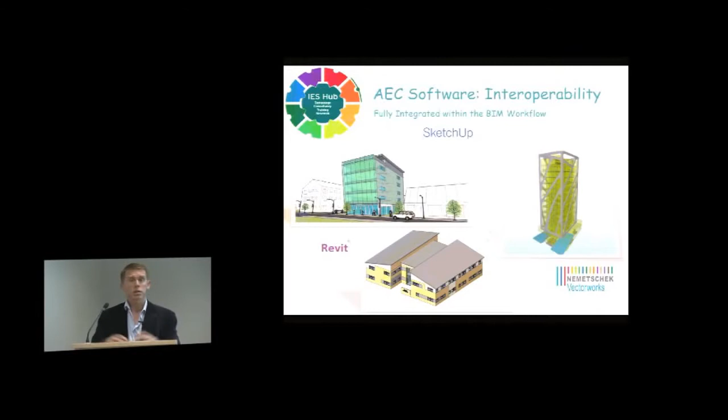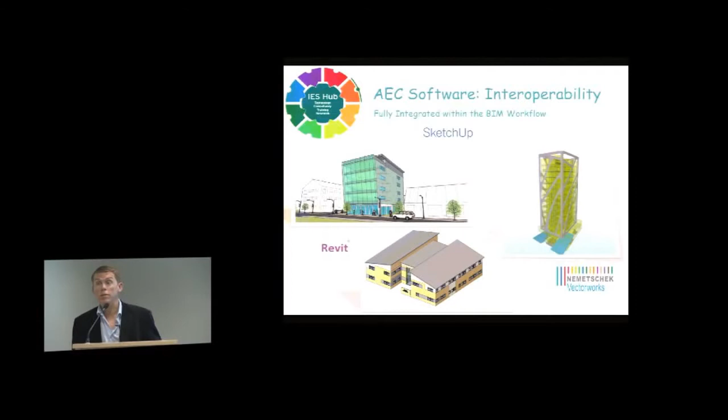Okay, interoperability, really important, with the UK GBC talking a lot about how important interoperability is for the design process, particularly when we're talking about BIM. We are part of the BIM workflow. We've always referred to ourselves as BPM, Building Performance Modelling, as opposed to BIM, Building Information Modelling. But in essence, it's extraordinarily similar - it's information and it's being used for a process. The BIM world is mainly to do with drawing production, but of course there's structural and other things that go with it. For us, BPM world is the performance side of things, and for the users of our software, you'll be very familiar with what those things are. I'm not going to talk to those today, but the interoperability between BIM and BPM is something we take a great deal of care over, and something extremely important, both for ourselves as an organisation, but also for all of you guys, the users.

You will be using some BIM platform of some description. It may be Revit, it may be SketchUp, it may be other platforms. Vectorworks, for instance, is one that we're going to show today a little bit. And the interoperability between that tool and your interoperability between an architect, if you're the engineer, or you as an architect, if you're using our software with our tools, is very important.

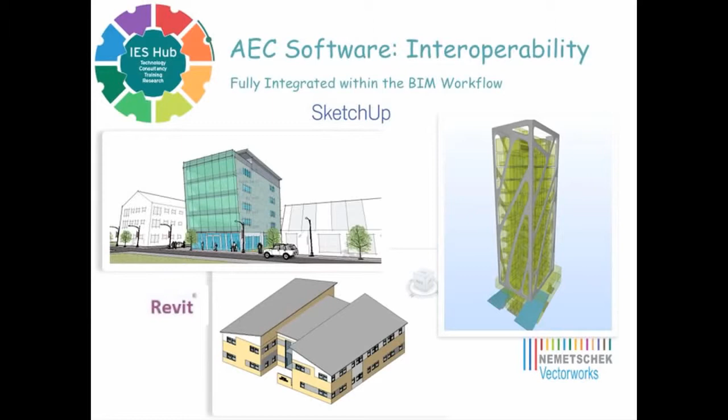We've been around 18 years. People have been sharing information and data with us for a long time. When we first kicked off, we had to create our own drawing platform because there wasn't a drawing platform to do things in 3D when we started off. We still have the drawing platform, but more and more we're doing interoperability with other building information models. So you'll be familiar with our Revit plugin - we've had that since, I think, 2008. You'll be familiar with our SketchUp plugin - we've had that since SketchUp version 6, similar timescales. We have improved that recently, and I want to show you that a little bit.

Really recently, for the main release back in April, we've started down the interoperability route using IFC. Particularly recently, we've been doing some work with Nemetschek and their Vectorworks tool. Nemetschek are releasing today Vectorworks 2013, and as part of that release, we have capability to take IFC from their models into the VE, and I'll show you a few examples of that and how that fits together and how it's going to work.

We're part of the Open BIM Forum, or at least we're just about to be, and with the new release of Nemetschek's Vectorworks 2013, we've actually got two routes to share information. Vectorworks 2013 has a GBXML export, which most of you should be familiar with, and we also have an IFC connection with Vectorworks as well. To give you an example of the kind of information that's already being shared - we've worked quite hard with Nemetschek over the last 6 months or so in order to ensure this connection is robust.

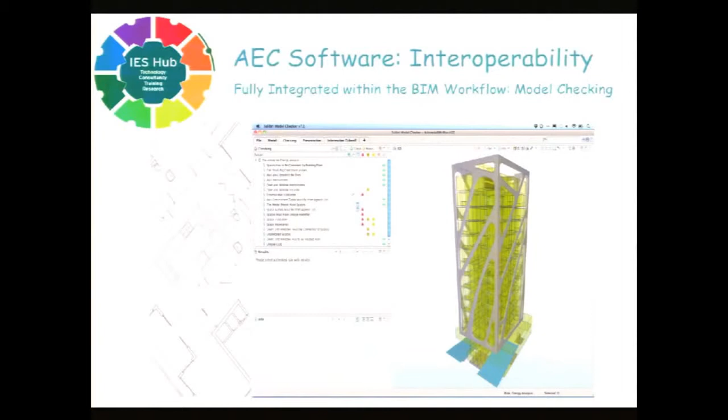I'm going to show you one particular example. It's a pretty complicated building. That's not our software - that's a piece of software called Solibri, which I believe is free. It's an IFC checker tool, and this is the IFC from Vectorworks being shown in Solibri before it gets passed to IES. It doesn't have to go via Solibri, let me be clear about that - it's just a way of checking IFC.

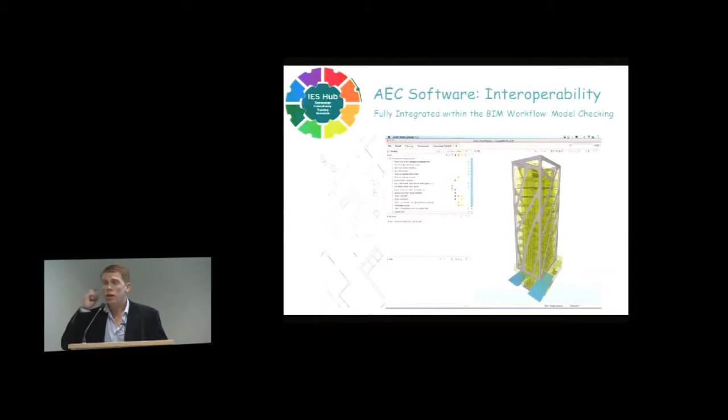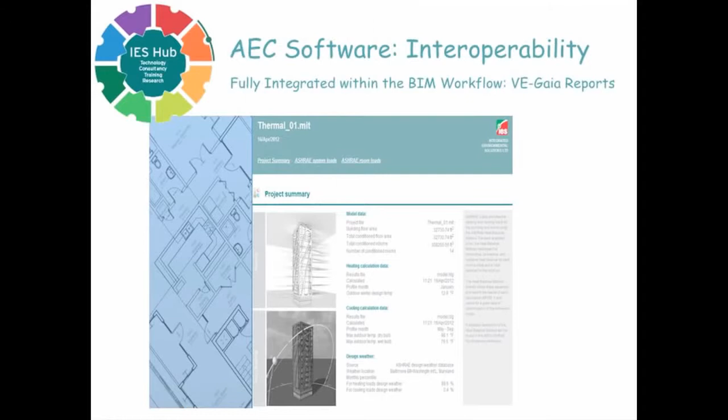This model is quite a complicated multi-storey building with an interesting shaded facade. This IFC is passed through to the VE, and I'll show you a few examples of the output we've got from it. That's not terribly clear there, but the VE Gaia reports that you'll all be familiar with can work on this particular file interchange, and also all the regular SunCast and MacroFlo type work that you can do within the software has been done with this pretty complicated model.

Now, the important thing to note about IFC is it's got ways of defining geometry which are able to cope with what we would call within IES the inner volume method, where you've got thicknesses of walls being taken into account and depths of reveals. And in IFC that's called second level space boundary.

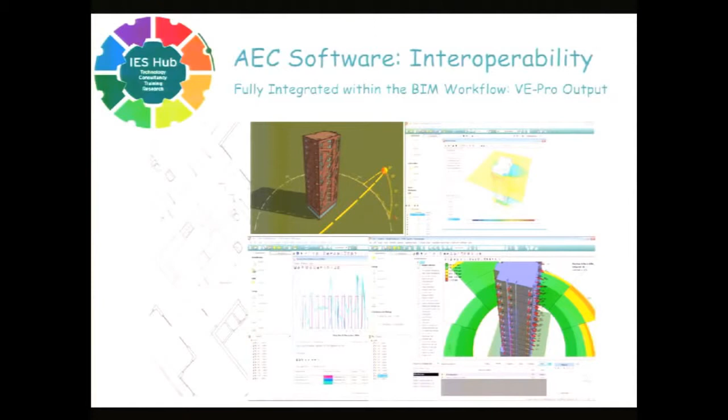That's a pretty sophisticated way of manipulating the entirety of the geometry through into an IFC file format for then to be used in any sustainable assessment. If you think about daylight modelling using the radiance part of the software, and also energy modelling, the depths of the reveals and thicknesses of all the constructions cannot come through GBXML. That level of geometric robustness is really important if you're doing those kind of studies.

We're focusing particularly today, because Nemetschek are launching Vectorworks 2013 today, on their IFC interchange with us. But any of the BIM platforms that export IFC, we could now take that information into the software. It's an alternate route. There's GBXML for you, and there's IFC from all packages. There's the Revit plugin, and of course then there's the SketchUp plugin as well.

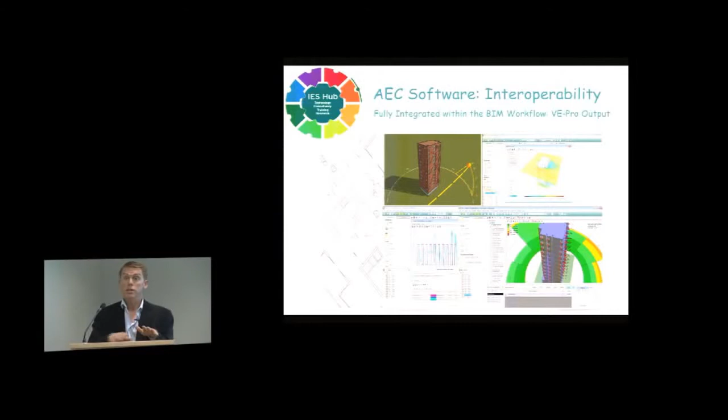That brings me nicely on to the features I want to talk about in the SketchUp plugin.

Oh, I forgot one thing, sorry. The sample model that you saw can all be got from the Nemetschek website. Since their launch is today, they didn't actually have the exact address for me, so if you email sales@isv.com, I can forward that link on to you and you can get that project and see how the thing fits together. It's an extremely big step for us.

With the UKGBC looking to make sure that projects can be interoperable with places like Scandinavia, all requiring it, with the Nordic regions all requiring it, with the GSA in America, the General Services Administration, requiring that you've got interoperability, our capability with IFC is a really important step, certainly on the building performance modelling side of things, in order to ensure that robustness of the design process between drawing production and analysis.

The SketchUp plugin has been around a long time, actually. Version 6 of SketchUp, and we're on version 8 now. I don't know if you're on the beta trial for version 8, but our plugin already works in version 8, and there's a few new features that are going to appear because of that. There's also a few features that crept in at the end of the last release that you may or may not have seen that I want to draw into it all.

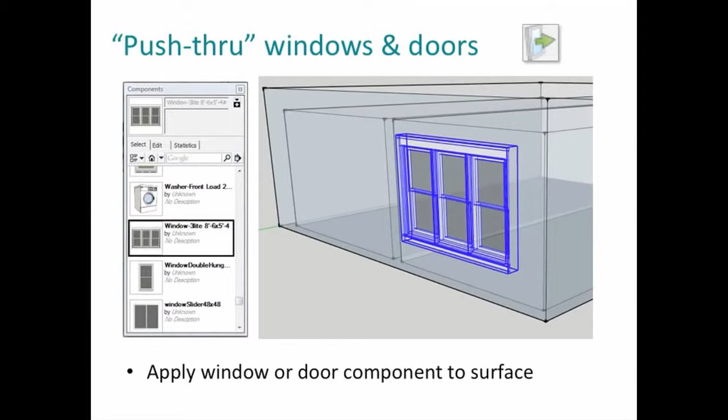You don't have to create your own window arrays. You could go to a particular manufacturer, get their components, and download them into SketchUp, and you've got the thing, which is fantastic, because then you've got all of the correct geometrical information you need in order to model this for daylighting or energy or whatever you might be doing with it later on.

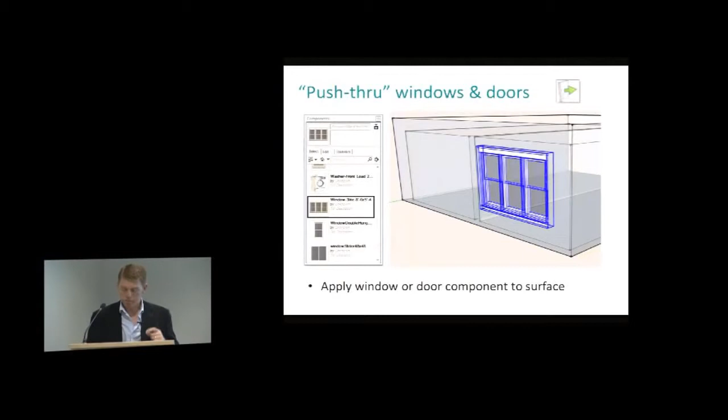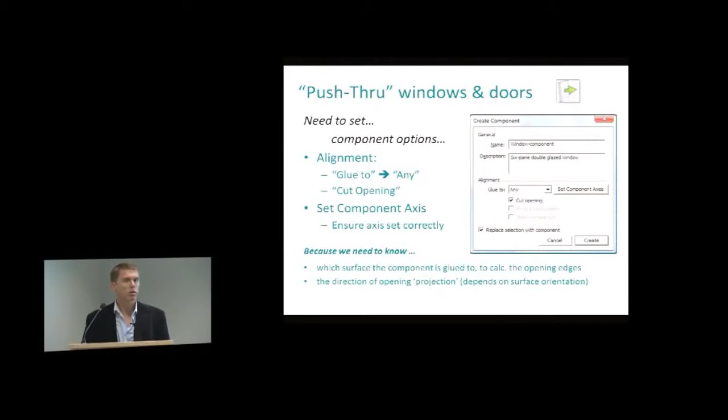Not many folks are using this feature. There's a few things to note about it that are quite important. One is you have to turn on the glue feature, so it glues the component to the surface that it's on. We'll be passing this presentation around afterwards, so you can pick up on these things.

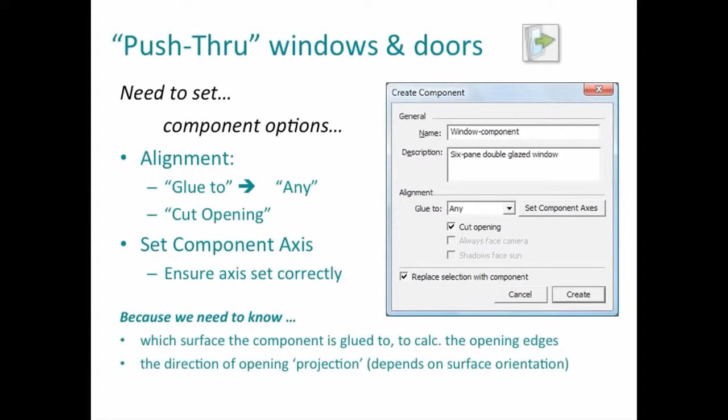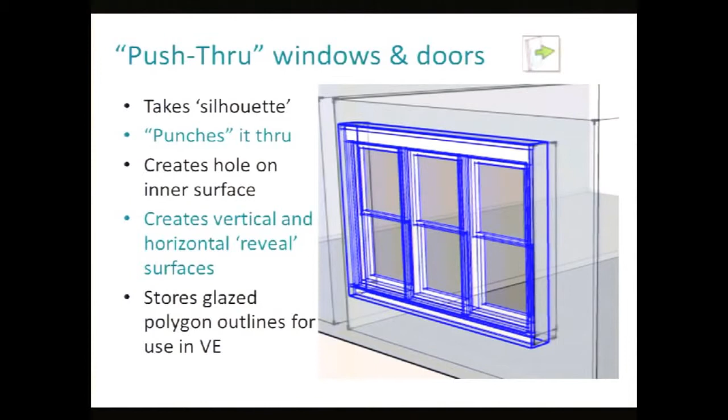When you do, we've got an accelerator in the software which, after you place the component that is a window or a door or any cookie cutter, if you like, that goes on any surface, automatically creates all of the reveals for you. So you place all of these windows all the way around all the stories, select them all, and say, cut them into the geometry. So you've in effect cookie cuttered in everything. It does that automatically for you. And the important bit in terms of modelling is it stores the glazed areas correctly in the VE model, ready for any further analyses.

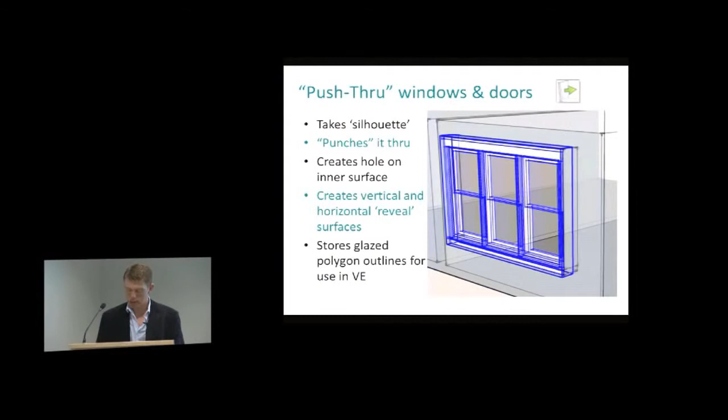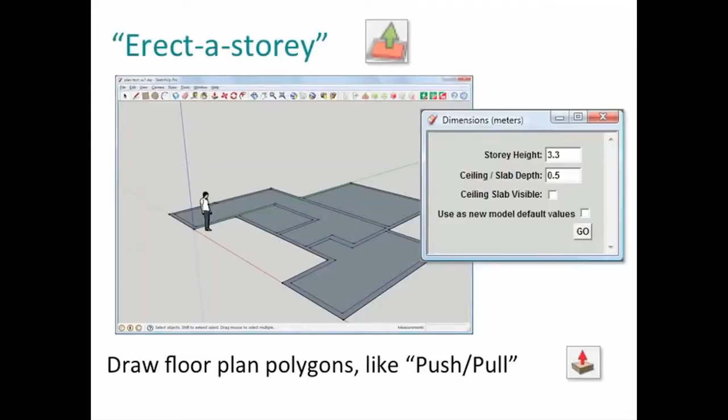Something else folks aren't picking up on, this was in the latter version of version 2: you only have to draw, if you're starting from scratch, the layout of the thicknesses of the walls and the floor plate, because there's an accelerator that will draw your walls, cap all your ceilings, and put your ceiling slab on for you. What we see quite often is people drag the walls up, get all the walls, put a slab on top, then extrude that up again to create a slab. That's 4 or 5 extra pieces of work you need to do, and this will do it automatically for you. It's a real time saver.

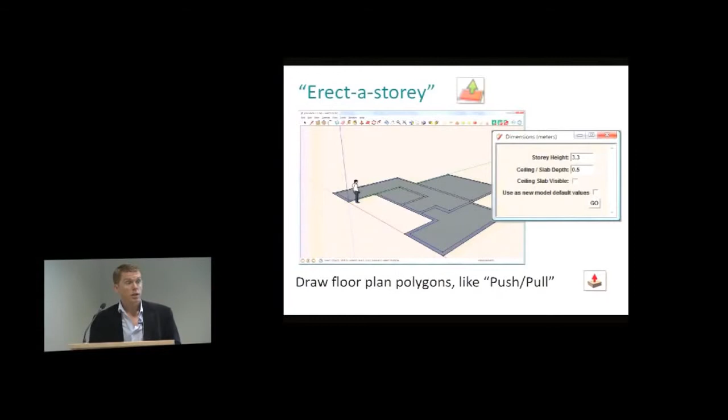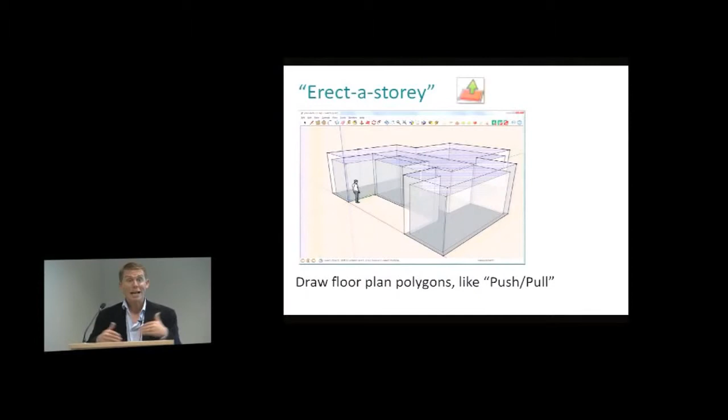If you've got a multi-story building as well, you'll notice there's a multiple story choice, which means you could do 25 floors in one operation. It's a real big time saver. And you can see, just from that floor plate, it created the enclosed volumes in exactly the way that's needed for energy modelling and daylight modelling. So it cuts out the opportunity for the odd mistake to creep in when you're doing your drawing in SketchUp.

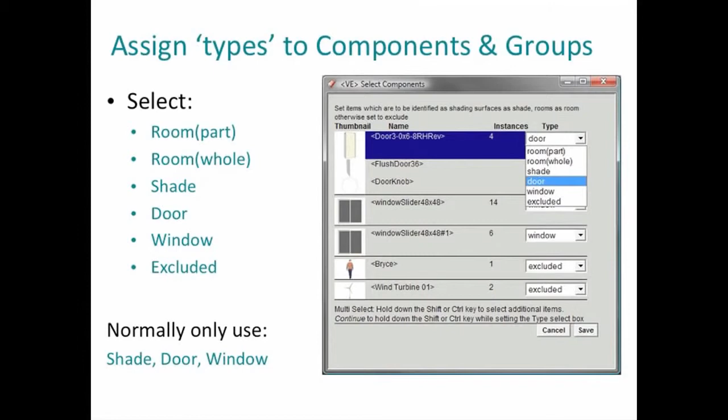Components and groups, another new feature. We use those to define what a window array is or what a door array is. We use groups to group up buildings for simplicity of selection and deselection when you're just generally using the SketchUp program, not for reasons of analysis particularly. But there's one in there that people don't use, and it's another one of these real big time savers, and that's the whole room choice, room whole.

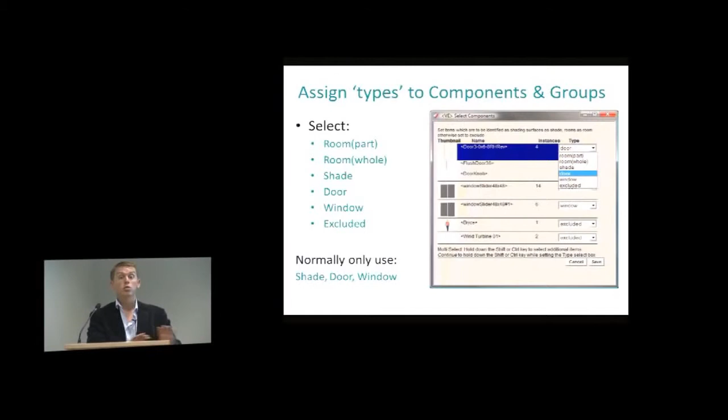Now, what is that? A lot of people still ask me what that is. What it does is once you have defined rooms as rooms and you've asked the SketchUp plugin to analyse all the rooms, it holds that room list in memory and never looks at those again. It never reanalyzes them. The analysis of the model, if you've got a very big model, can take a while. So after you've analysed the rooms once, you store them as rooms, and you never have to analyse them again.

If you are doing multiple variations and multiple additions and subtractions on your building, which architecturally you will be, this is a real important feature, and I know from the support questions that people aren't really using this at the moment. So please use that. That's just an example building of that.

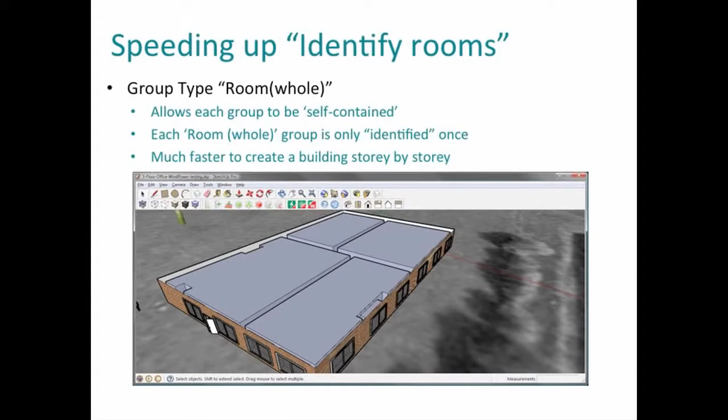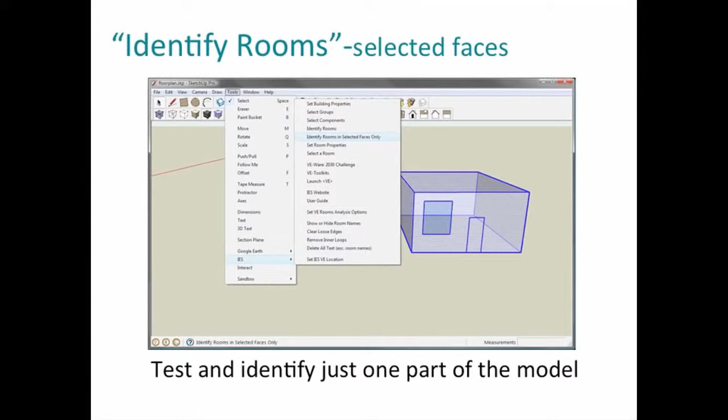The next is identifying issues. As I said earlier on, if you follow the workflow, things work nicely, but people are in a rush and lose concentration, and sometimes errors creep in. Nobody's perfect. There's a few tools in there that help you get to the bottom of where there are issues. What's the biggest issue when you're exchanging geometry or preparing geometry in SketchUp for the VE? That you've not got an enclosed volume.

That's the one that crops up the most. What's an enclosed volume? Simple. In this room, if we think about it very simply, there's a floor, a ceiling, and walls. As long as you've got all of those, we know what the volume is, what all the surface areas are, and all the heat transfer connections to everything around us. If some of those are missing, and they're not defined as windows, holes, or doors, we need that resolved. We need you to tell the software what that is. So we kind of moan at you a little bit and say, that's not a fully enclosed space.

How do you know where the problems are? Well, if you use a SketchUp plugin, a blue space is a room, and a yellow space is a shade and obstruction or a non-complete volume.

But did you know that if you select any single surface and right-click, you can highlight particular rooms, or a selection of rooms, or rooms connected to that line or face? If you're trying to sort through your model to establish where the issues are, it can be quite tricky in a large SketchUp model. This feature enables you to select those.

The next stage beyond that is the highlight gaps tool. It'll highlight the space that isn't fully enclosed. That's been in the software for a long time now, but finding out where your particular issue is, again, SketchUp models can be quite complicated.

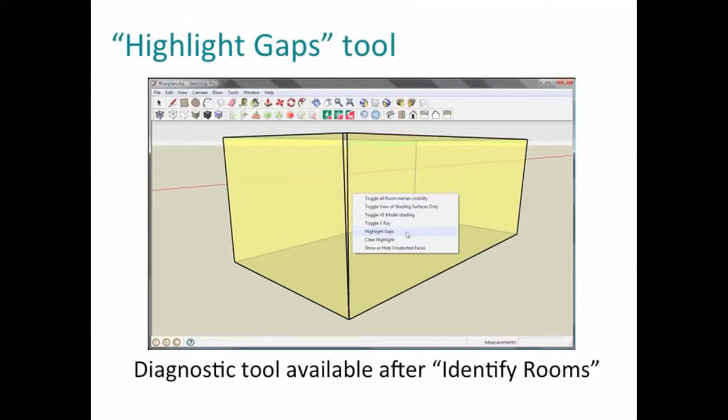I'm showing here a room with no furniture, no windows, no external landscaping, no people wandering around, no detail on this model at all. But that's not like the models you guys are going to be using. You're going to have a lot of extra information in there, and seeing the wood from the trees can be quite difficult, and this is a real time saver.

When you're trying to find that one thing that's stopping that room coming through, why might that be? You might have pushed another wall through and SketchUp's sliced that surface away, and now we've got a missing surface and need to fill it in. It's simply a matter of drawing a line across the top of that gap, and you can fill the thing in.

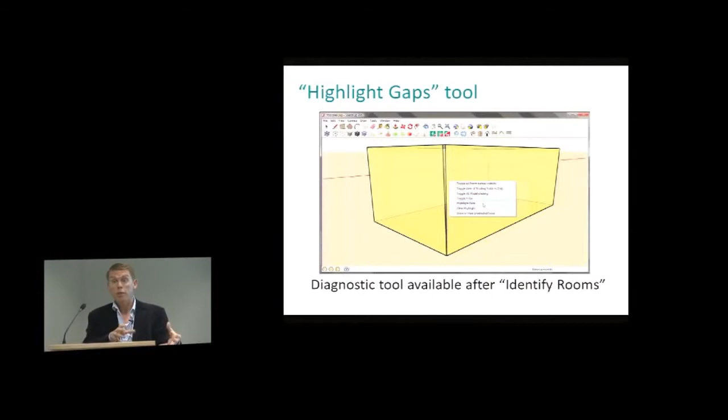So very quickly, those are the main key features in the SketchUp plugin, and also the newer features in there to help you identify some of the issues you can get when exchanging geometry. And just to help you, there you go, if you hadn't seen it already - there's the gap.

We'll move on really quickly because I want to allow the partners time to talk this morning. But I do want to talk a little bit about our IES Tap tool.

IES Tap, TaP stands for Tracking and Planning. It's a management tool, a web-based tool. It's not part of the full VE - you can hook up to this thing anytime on the web. What it is, is a management tool for BREEAM and Code for Sustainable Homes.

What does it do? Imagine sitting in a charrette at the beginning of a BREEAM project, with all the people around you. You want to assign responsibility to all the people in the design team for the aspects of BREEAM they're responsible for, put times against those, and, as the BREEAM assessor or the person in charge of delivery, make sure all of those things are covered and dealt with.

Through this web tool, you assign responsibility, deadlines, and people's email addresses - practically, who is going to do all of those things. It gives you a pre-assessment of what score you might get, and throughout the length of the project, it keeps you informed as to progress.

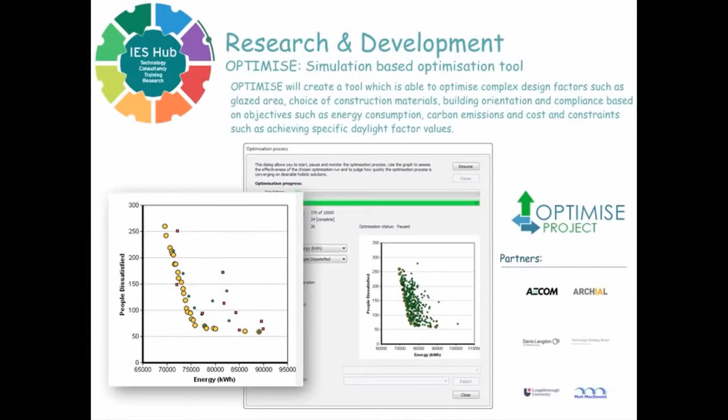But there's always ways of improving software, always ways of making workflow better. We sat and thought very hard about what we wanted to do for submissions to the TSB, and we won a few projects, and this is one of them. The project's called Optimise, and the clue's in the name, it does what it says on the tin.

It's a way of having a look at multiple different options for sustainability through the software, where an optimization algorithm will help get to an answer faster than you could do yourself. So let me give you a for instance. If I had a number of orientations, a number of proportions of glazing, a number of types of material choices, a number of types of glazing choices, and start to times all those things together, you soon get up to a big number of parameters and therefore simulations that you might want to study.

Now let's be realistic, you're never going to do it all. So what do we end up doing? We use our experience, pick the best ones, and do as much work as the fees will allow, and of course that's the right thing to do. But what if I could extend that a little bit, create a whole list of scenarios, and allow the software to go away and find an optima? Or, I chose my word carefully there, because it might not be one thing that's the optimum. There might be a few options that will work rather than a single one.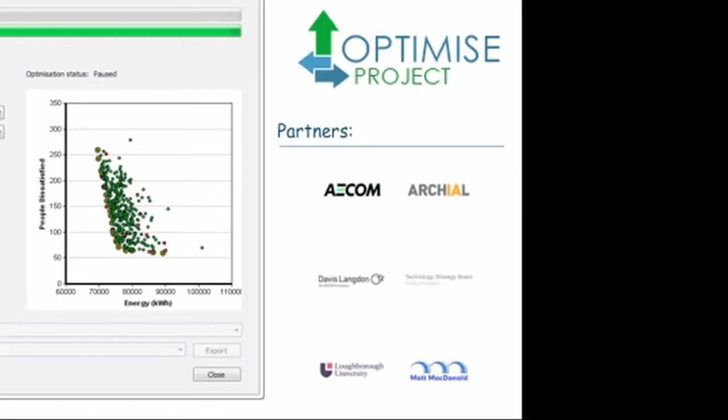We worked with Archial, who are architects, from an architectural perspective of what we want to see from this tool. We worked with CIBSE, so we got an industry-wide understanding of how the tool might work. And we worked with Davis Langdon, because part of optimization is about cost, and there's no point in doing a wonderful sustainability study without a view on what the thing's going to cost. That's not the real world. And quite simply, cost in the software, in the VE software, is something that isn't really utilised in the way that it might be.

This project has allowed us to bring AECOM Davis Langdon and their data into the software. For that, I'll hand over to David Holmes. I've worked for Davis Langdon for 10 years now. I'm an associate, and the team now is called Business Intelligence - our business, our intelligence, what we're doing for ourselves.

Part of my role involves exploiting our own data, mainly for internal purposes, because that's where it's most important, but also more and more for external use. We've produced the SPONS price books for many years now. I'm responsible for the A and B, the big red one - that's my job, but I manage the process of all the others.

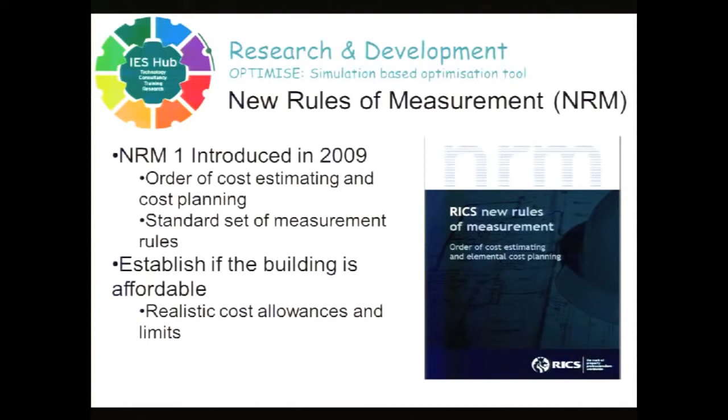So we're picking up all the cost estimators - this is like stage A and B, really early stuff. We have a standard set of rules now, at last, which is quite good. The problem when it came out was the 2008, 2009 massive crash in the market, so it hasn't moved on as quickly as it should, but we're catching up now, and others are catching up - things like BCIS are now converting all their cost plans, the existing cost analyses, into NRM format.

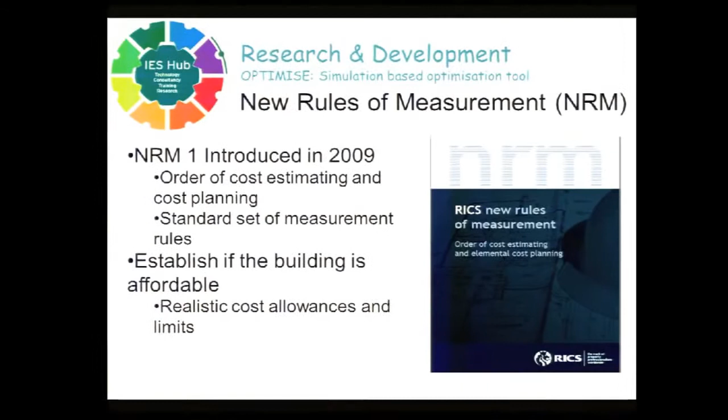So we can be more use, we can swap and change things around. What we're trying to do with the Optimise tool is establish the affordability of the building - that's what my main aim was. An architect puts a sketch together, imports it into IES VE - what's it going to cost? Can we afford it? That's the main drive for what we're going on, and just to introduce some realistic allowances in costs, so you can see where we're all going.

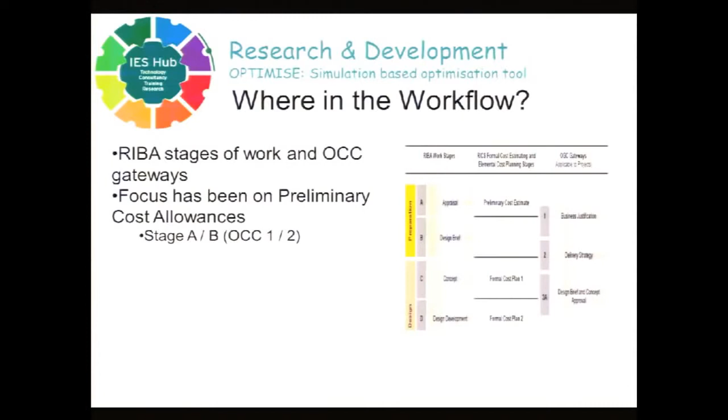So RIBA stages, we're up at A-B, which is really where we need to stick. If you're using the tool within the IES environment, stop there - in all honesty, don't keep reusing and trying to develop your own cost plans. I wouldn't recommend it. You need a QS for it - there isn't a mini QS set in here doing your work for you. You need an awful lot of thought and effort going into it all. So we're looking at stage A and B, 1 and 2 on the OCC gateways - that's where the focus has been.

Where to start? When you import a model into the software, you can pick a building type. There's, I've no idea, a few hundred of these building types that we look after, update every year, and keep going, and you pick the one closest to your building. It's as simple as that, and it'll give you a price per square metre. These are based on internal floor areas.

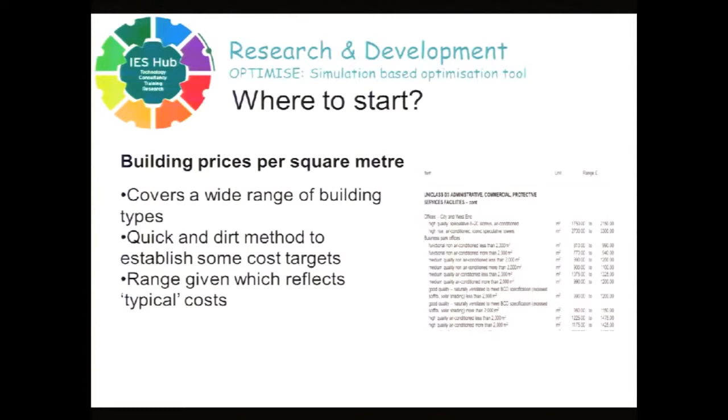It's quite important that when the architect draws the building model, he labels things properly - if it's a floor, call it a floor; if it's a roof, call it a roof. We have our own internal software which we use for doing our measuring. An architect recently submitted a drawing, and he used the same layout for the roof - a C-shaped, U-shaped building - for all the kitchens, but he didn't relabel the kitchen worktops and left it as roof.

When we did our bulk checking, because we have a bulk checker, we suddenly found we had like 3 times as much roof as we expected. It took half a day to find out where that was. So labels are really, really important - in the BIM world, it's critical. We have a client guide now that we put out, so when the client appoints the architect, these are the things we want from that model so we can import it into our own model. If it's not labelled properly, we really are stuck.

We have to start again, so it's not really good, but you can quickly get a quick and dirty method of measurement.

Okay, my building is going to cost about £1,500 a square metre. Import it in, IES tells you how big it is, do the multiplication, that's obviously going to cost me to do. So straight away you've got, okay, I'm a £20 million building, I'm a £25 million building. I'm getting some order of costs very, very quickly.

You see there's a range. It doesn't mean you can't get it for less or for more, in all honesty. It's just that's what we think the range should be for a particular building type. Lots and lots of things affect the price of buildings. We can't just give you a price for a building off the shelf. It doesn't work like that, I'm afraid. Really nice, but it doesn't work like that.

Next level down, once you're satisfied that your model's working, is to do a bit of an elemental breakdown on what's going on in your building now. Again, there are models and templates set up within IES. Not too many at the moment, but that's going to increase over a short period, just to allow you to get some breakdown of where the money's been spent.

£25 million for a building, fine, but how much is my cladding costing me? How much is my roof costing me? What sort of options have I got in there to adjust the price for those things? And that's what this gives you.

If you click on the cost plan tool, create a cost plan based on it, pick a template, and it will fill it in for you. Then it multiplies by the floor area, gives you the rates. So all those rates down there are for the gross internal floor area.

You need to be aware of two things. We don't include demolitions, remedials, all those sorts of bits aren't there because they really are project specific, just can't do that one. And we tend not to include external works, again because they're too project specific. So we just get the core building, walls and roof, substructures, and away you go.

So that's not the answer, but you're going towards the answer. What else do I need to think about?

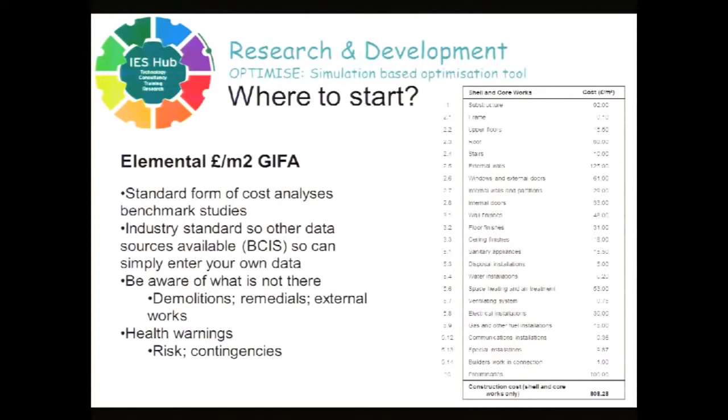BCIS do the same format, so if you subscribe to the BCIS, you can get their cost analysis, and they do exactly the same thing. I think they just have like 16,000 building types instead of 400 or 500. Same answers, anyway, so you can use that as well, just type numbers in.

Not there, just sit and type numbers in, but you don't want to do that really, just go for it. So think about these two, what's missing, what's not included is more important in all honesty. You need to think about what have I not got.

And do some risk assessments. There's lots of things that affect the price of the building, and we can't list them all down, there's just too many. You need a QS to do that for you. And we need to keep earning our fees, I'm afraid, so that's what we do.

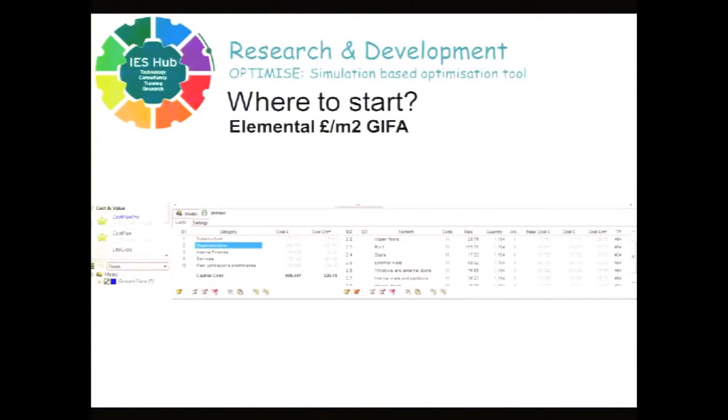So looking at a cost plan, this is from Cost Plan Pro, which is what the new cost plan's called. There's my main elements, substructure, superstructure, internal finishes, and click on superstructure, and I get a bit of breakdown. There's my upper floors, roof, those bits and pieces that guide me to where I'm going. There's a little code, code number 11, which in IES speak is gross internal floor area. So that's a straightforward multiplication.

And it just gives you a bit more analysis. What you can then do is click on Windows external doors, and that will expand a little bit more, and you can type in your particular window types if you want, or you can select an area of window.

Different number. So 11 is GIFA, windows are 32. Pick code 32, and the software tells you you've got 150 square metres of windows.

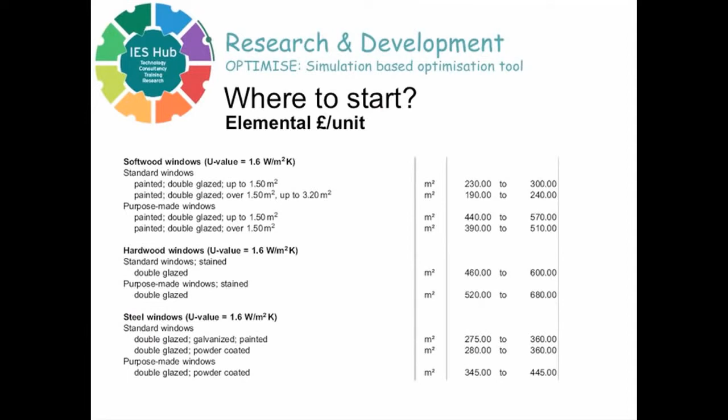What you then need to do is say, okay, that window is going to cost me some money. It's not a GIFA rate, it's not £50 a square metre for my floor area, it's £50 for my window. And you pick hardwood, softwood, steel, aluminium, and a few different types. Not lots and lots and lots, but there's enough to make it work for you. And you say, okay, I want this one, the double glazed, a reasonably sized window, it's going to be 190, 240 pounds a square metre for that window, which will be a fixed window.

All right, it's up to you, it's your cost plan at the moment. Go and change it. You can change back to the default if you want to, there's a way to do that, but just go and change it. Gives you the cost plan. And you can work your way through all the elements if you want, if you really, really want. Wouldn't recommend it.

You need to stop at elemental type level, because that's where the benefits are. You can quickly run through those and do some options very quickly.

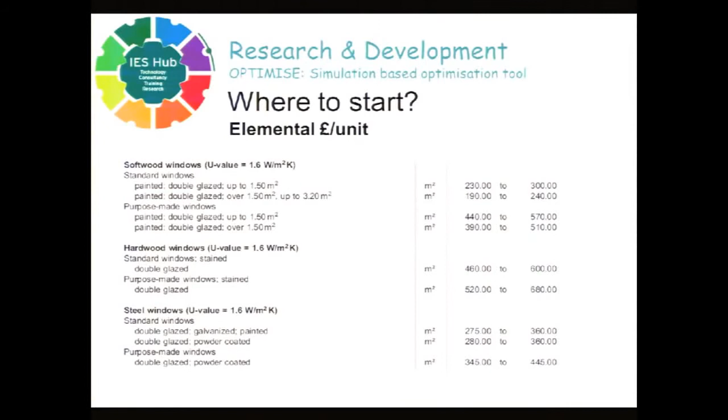Be aware of what's not included. Because the way we work our price out, we lump things together and say a door costs this much money. If you price a door from a price list, it includes the things needed to make that door work. But lintel, frame, and other bits and pieces tend to get measured separately. So don't lump things together too much, but think about what might be there.

And that's it, that's how it works. You click on the button, I'll have one of those - it's a 32 on my window area, and away you go.

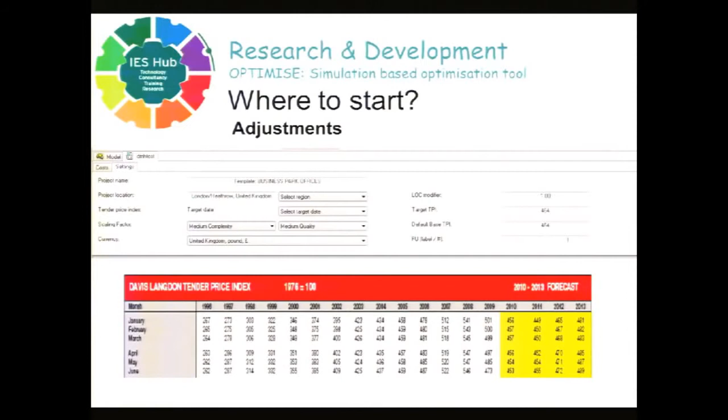The other thing we built in - you need to make adjustments to these things. Location is quite important, so there's a whole series of locations to pick from. Our prices tend to be like 1, so we assume a price location equals 1 and work from there. So inner London, you're going up about 10% or so; Birmingham, perhaps down 3 or 4%.

Think about those adjustments needed to make the cost plan work. Where is it going? Think about the timing - I'm pricing it today, but it's not going to be built for 2 years. So there's an index formula that allows you to predict what's going to be happening in 2 years' time. We produce quarterly updates and have our own tender indices.

If you bought this tool today with today's prices, the TPI is 454. In 2 years, it's probably going to be a bit higher in all honesty, but it's going to be about 470. So you click okay on my target TPI, a date pops up - June 2014 - what's it going to be? And it will just add on some money for you.

You can see all that when you go back to the cost plan tool. It will show you base price, index price, so you can see what's going on all the time. We like to see where we came from as well as where we're going to. So it's all there to be grabbed.

A scaling factor - how complex is your building - and a quality. Quality is easy, it's high spec, low spec, means what it might be. Complexity is much more difficult to sort out.

Different things drive costs. The shape of the building is really important to us. The wall to floor area is really important. The net to gross efficiencies are really important. So think about how complex your building might be - it just moves you up or down the scale.

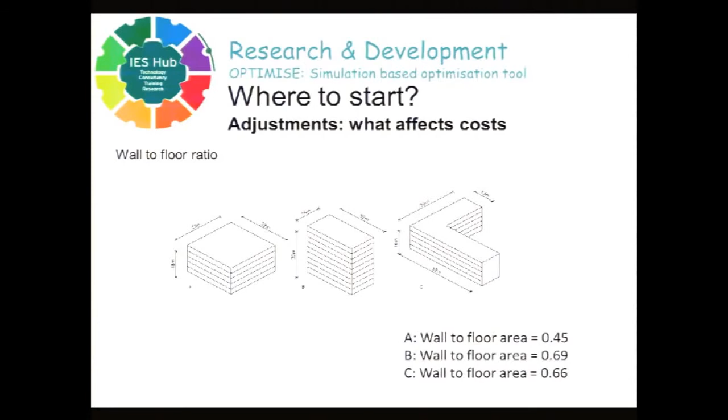So this is just a sample of some wall-to-floor ratios, which are a massive driver for tower blocks. Three different scenarios - wall-floor ratios of 0.45, 0.69, 0.66. Ideally 0.45 or lower is where we want to be, but it's not always the case, so you need to work your way up. Think about how tall the floors are, your floor-to-floor heights, your floor plates, the shape of the building - all of this affects the wall-floor ratio, and that's what it does for a typical London office block.

So all these things affect how we're going to put these together. But hopefully, if you run through all these things, tick all the right boxes, and give it a bit more thought than you would otherwise, you're going to end up with a cost plan.

The costs within IES, the software, come from SPONs. This is based on a project value of around - it's moved - it should be about £3.5 million, which is where we think that's a typical value. So up to 5, perhaps down to 2.5 million, the rate should be okay, it's not making much of a difference. Once you get beyond those, you start thinking about it again - if it's a massive project, I need to think about reducing my cost a little bit, how do I do that?

If it's a very small project, don't use the software, basically - it just doesn't work, it's too unique, the numbers just dive off. So a project in that typical range, fine, we can make it work, and it does work - I've done a lot of analysis on these things over the years, so we know where we're going. There is a diminishing returns - once you get to a certain size project, it doesn't save you any more money, so you've got to think about those sort of things. But a very small project can keep costing more and more and more money.